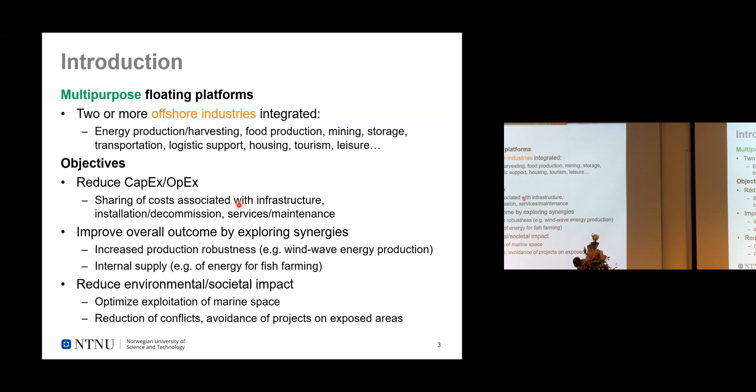So the scope here is multi-industry rather than multi-activity. For example, an FPSO would be an example of a platform that encompasses many activities, but it's not multi-industry because all the activities are serving the oil industry. So here I'm talking more about different industries. So wind energy and wave energy and fish farming, for example. And I'm focusing on renewable energy plus fish farming because that seems to be what's attracting most attention of researchers and industry lately. And there is a vast amount of publications and projects.

I'm talking about multi-purpose platforms in single blocks rather than modular platforms. And I'm sticking to preliminary design analysis because this is a non-established industry. We don't have any example of a commercial and successful platform yet. So it's not the time to go for detailed design and cost effectiveness analysis and those things.

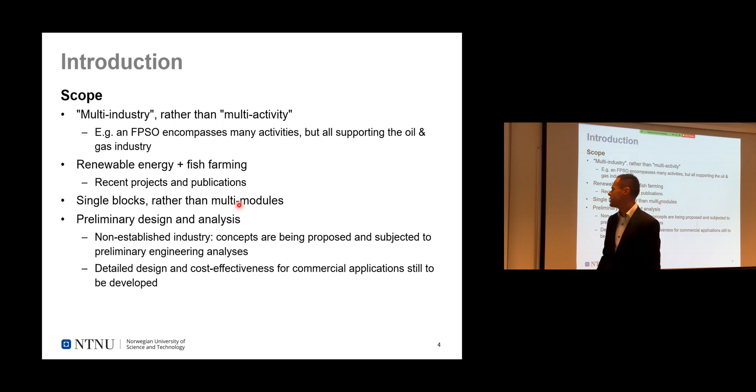Okay, so I think it's interesting to see some of the previous projects and concepts. The European Union has funded a number of projects in this topic. One of them is the Marina Platform that ran from 2010 to 2014, which had the goal to create new infrastructures for wind and ocean energy, including combined devices. So the outcomes were many publications on multi-purpose platforms, but also a lot of data for siting of these platforms and even supporting tools that are available to the public today.

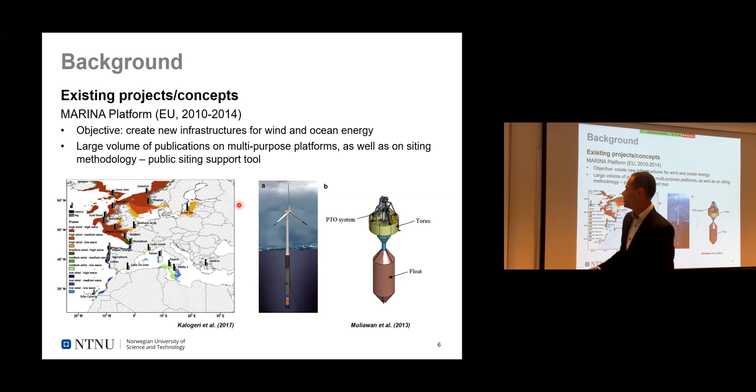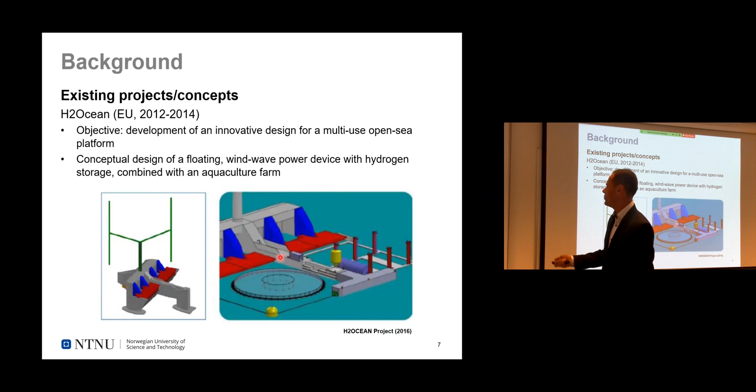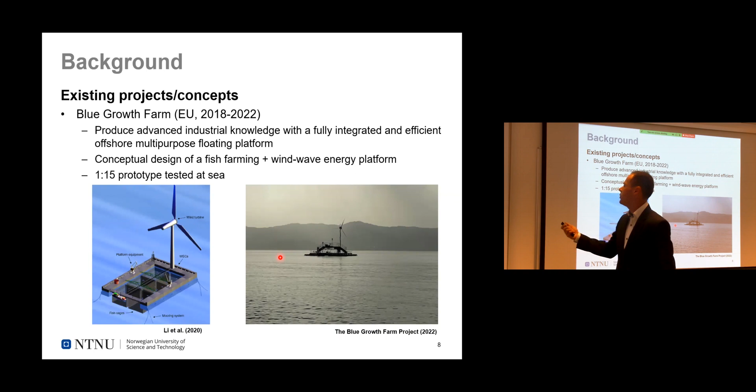The H2Ocean project was intended to develop one platform combining energy and fish farming together. It came to the conceptual design of this structure that has a vertical axis wind turbine, some wave energy generators, and a fish farm here in the wake of the wave energy device. And this Blue Growth Farm is a recent project that finished in March this year. The objective was to produce more advanced knowledge on the topic, and they came to a prototype, a 1:15 scale prototype tested at sea, which is a platform for fish farming and wind and wave energy production.

This example here is from a Danish company. It combines wind and wave production. So the wind can be from 4 to 15 megawatts. The platform can be modified. It also has a facility for storage of energy by electrolysis and hydrogen storage. And this is intended to be in the commercial phase now. But I don't know if they have sold one yet.

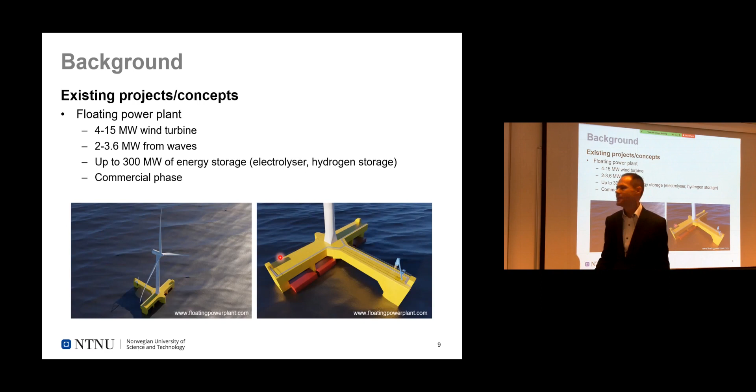I want also to show this example from a publication in Ocean Engineering some years ago. It's an example of a synergic design, which means that here they have a wind turbine, oscillating water column energy converter, and they also put a uranium recovery system to increase even more the cost effectiveness.

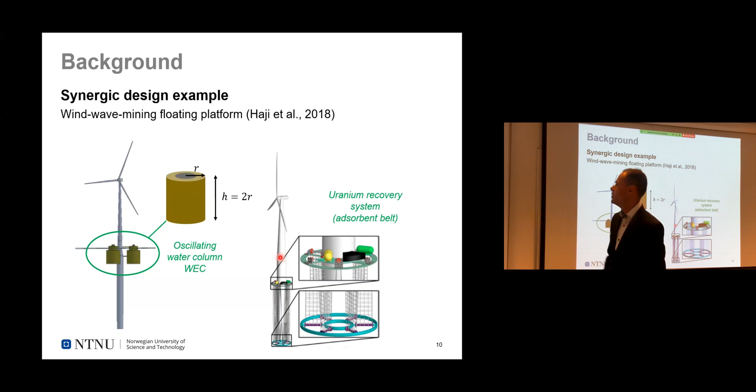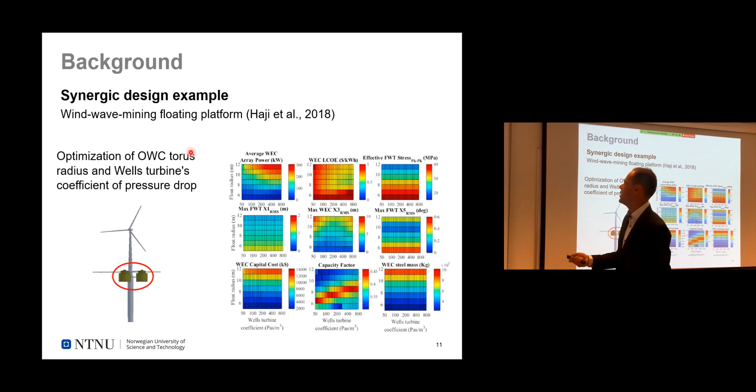But what's most interesting to see here is that this is the block that shows the stress in the tower of the turbine. So without the energy converter, the equivalent fatigue load during the lifetime of the operation would be more or less 30 megapascals. So it would be like this yellow bar here.

But as they install the torus and start to vary the radius, you can see that with a smaller radius, the stress is bigger than when you have a bigger than 8 meters radius. And that's because wave excitation up to 8 meters grows faster than the resistance to motion by inertia damping effects.

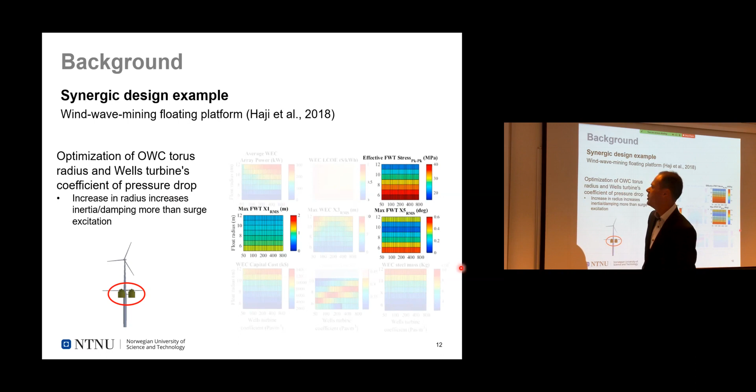And then you can see this is shown also in the surge and pitch motions. You can see the same effect, especially for surge. For pitch, it's a bit more confused. It starts to get lower again for very big radius. But okay,

then I think I can move to design. So I'll talk about some design considerations and show some of the methodology that have been proposed for this type of structures. I'll talk a bit about siting and construction considerations, station keeping, and design optimization.

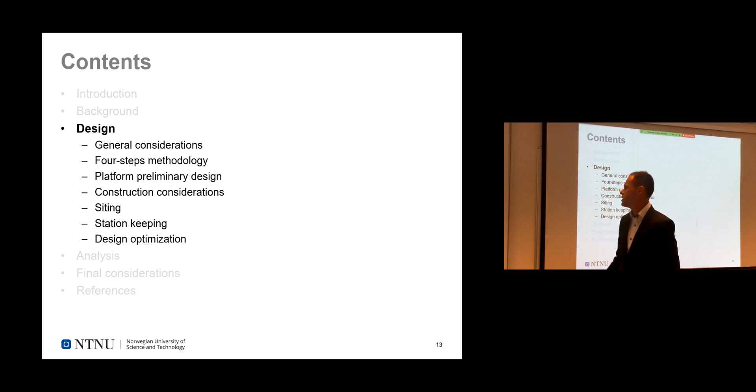So in general, we want to start from a dominant industry, which will be supported by other industries in the platform. So it's easier to establish from activities that are more established. So for example, if we're going to have a wind and wave energy converter together, the wind energy converter will probably be the dominant technology because it's been there for a long time.

The selection of activities will depend on the resources and the surrounding infrastructure, and not least social and cultural aspects, because resistance from society can be a problem for renewable energy in general. We have to live with the fact that we are going to reach suboptimal systems with the combined solution, because it's very hard to optimize all the activities at the same time. You sometimes can have conflicting constraints and objectives.

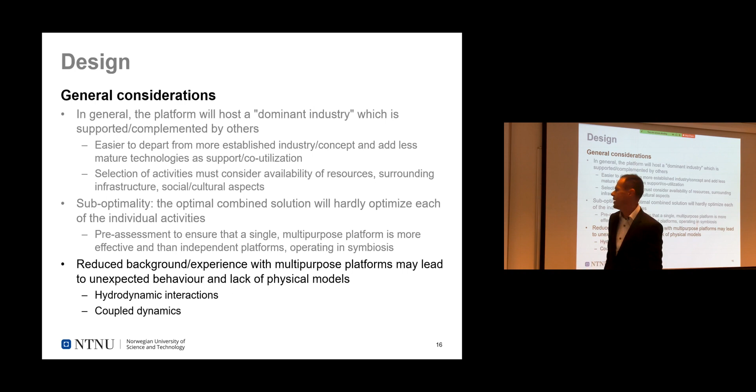So a pre-assessment is important to ensure that it's really more effective to have all the industries or activities combined in the same platform than having independent platforms optimized for their purpose, operating in symbiosis. We don't have a lot of background with these platforms, so unexpected behavior due to unmodeled physical effects has also to be expected during the design. That could be hydrodynamic interactions or unknown coupled dynamics.

Okay, so to cope with these complications, there have been some design methodologies proposed by these European projects before. So this one is very clear. It starts with a pre-screening process where you do a preliminary assessment of the available resources based on metocean conditions. And you compare it with thresholds.

For example, if you want to have a wind turbine, you want to have a minimum mean wind speed at the site. Or if you want to have fish farming, there is probably a limit in the temperature of the water. And also, at this stage, you're going to determine the feasible sites. Or if you have a number of sites that you can use, you're going to determine which industries will be embarked in the platform.

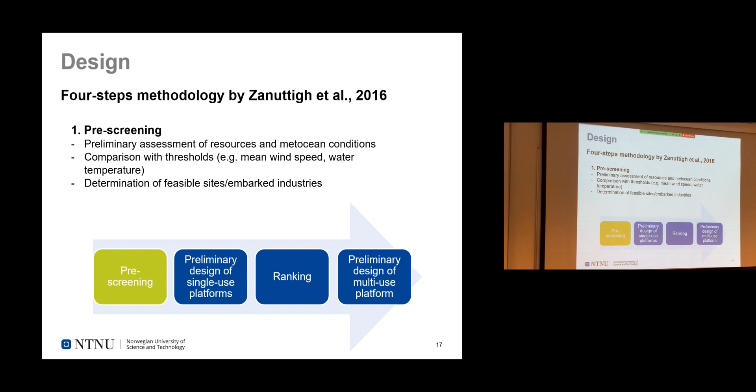The second step is the preliminary designing of single-purpose platforms for each of the technologies that we're going to install. So here, you can make a more detailed selection of the energy harvesting technologies that we're going to use. It's the time also to check for any legal constraints and to start to think about the solutions that you can have for multi-purpose platforms.

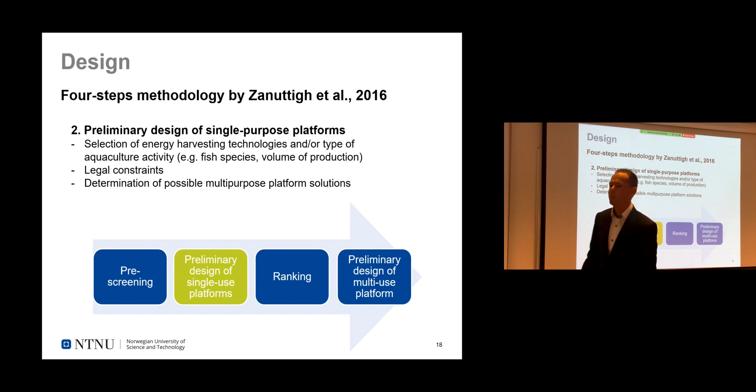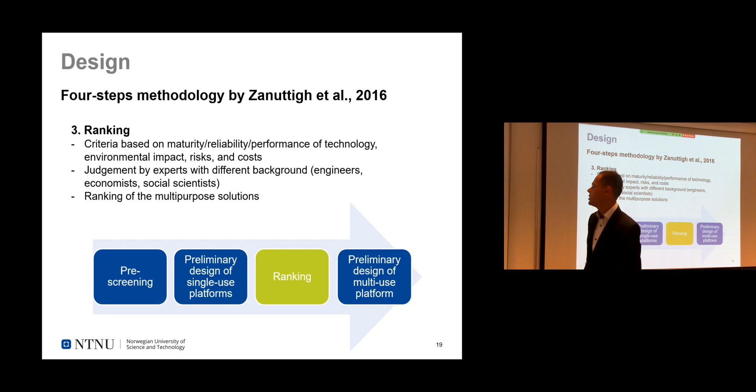The third step is a ranking. So first you create a list of criteria based on maturity of the technology, environmental impact, risks, etc. And then you call a team of experts with different backgrounds. So not only engineers, but also economists, social scientists, biologists. And this team of experts, based on the criteria, will make a ranking of all the solutions and see which of them are the most viable for that purpose.

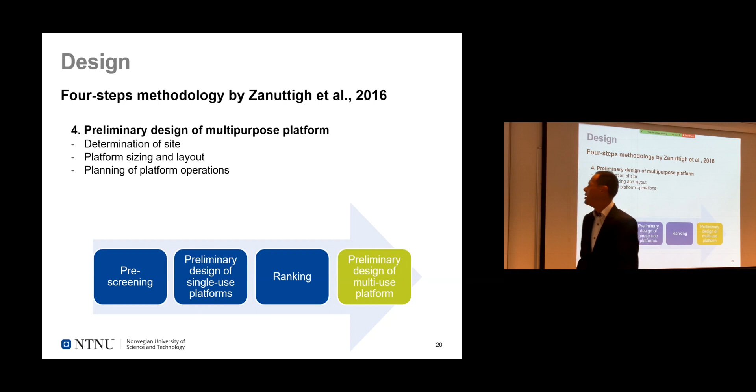And finally, the last step is to start with the preliminary designing of the platform. So we are going to have the final determination of the site and start with the sizing, layout and operations planning. Okay.

Yeah, the preliminary design starts with some candidate layouts. So the dominant technology will be the most important in the arrangement. The required capacity production for each activity is an important factor here. And then you make incremental changes on the dimensions and the layout until we reach a good configuration.

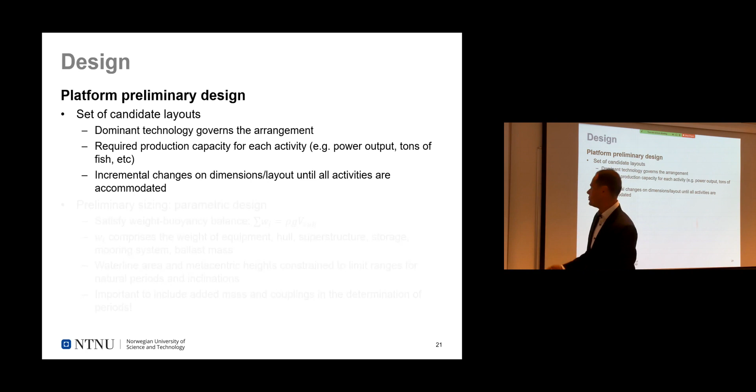So the parametric design consists of modifications of the dimensions with increments. You always want to satisfy the weight buoyancy balance because it has to float, but also want to ensure that limit ranges for the natural periods and metacentric heights are satisfied. It's important in this phase to include some good estimation for added mass and couplings for determining the periods.

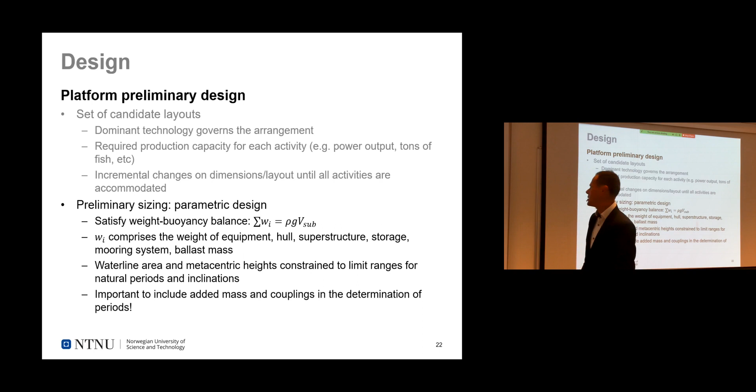And here, I found this example that I found very interesting. So in the design of the Blue Growth platform, they were looking into the walls of this caisson platform. So these yellow lines here are the cross-section of the walls. They started with this rectangular cross section, and they got to this expression for the period in heave.

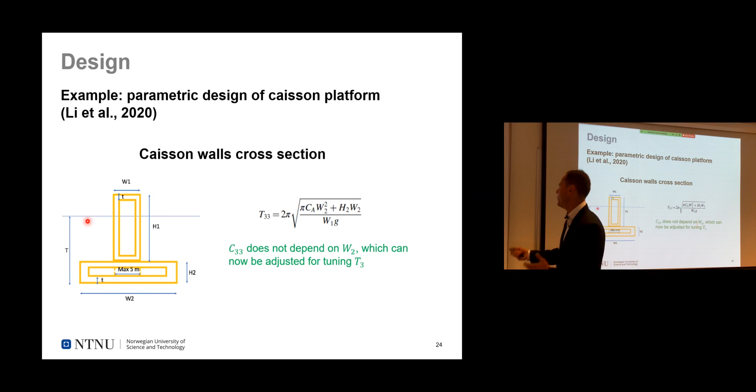But in this expression, they find that it's impossible to get a natural period in heave away from the wave frequency range unless they use a very, very large value for the width of the cross section. So then they moved to this different configuration. So here the water plane area piercing the surface is no longer changing with the width, and then they could vary the width in order to get the desired natural period.

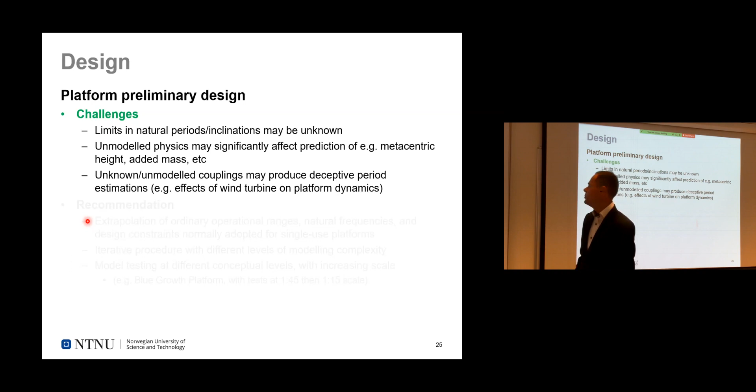Challenges that we're going to meet in this process are that we don't know what are the limits in natural periods and inclinations for all these platforms because they are very innovative. We have unmodelled physics. So for example, if you have these wave energy converters appended around the platform, they can affect the flow. And if you have, for example, a moon pool, you can have free surface effects. And these unmodeled couplings may produce deceptive period estimations. So you can have some bad surprise in the future.

So here, the way to cope with this is to, as long as possible, extrapolate the ordinary operational range that we're used to from offshore industries, and also design constraints that we normally use for single-use platforms. And always, iterative procedure and model testing is very important at different conceptual levels.

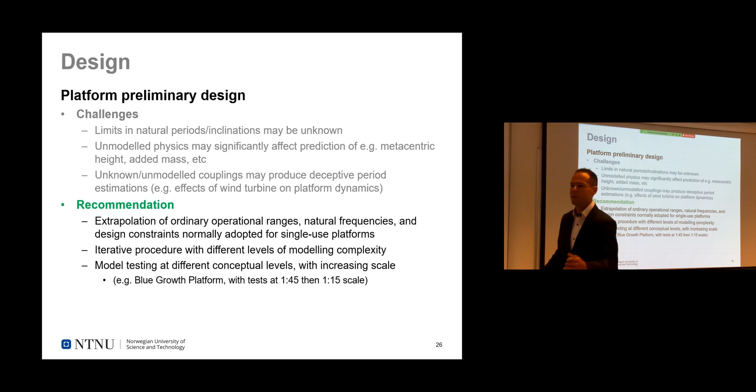Regarding material, steel is very popular in the offshore industry because it's reliable, it has good quality control standards, it's flexible and ductile. But for the size of these platforms, it may start to be more interesting to use concrete, which has extended lifetime and is not constrained, for example, to thickness of the steel plates, diameters of pipes, those things.

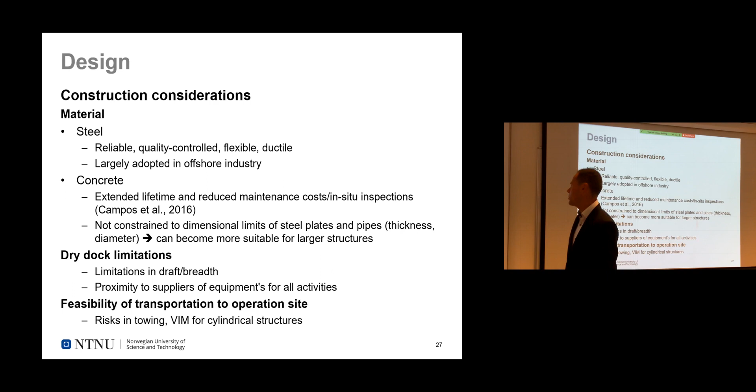During the design process, we have started to think about limitations in the shipyard. So dry docks have a limit in draft and breadth. And it's very important to have a network of suppliers close to the construction site. And it's also important to think about the transportation to the site when you're planning which shipyard you're going to use, because towing is a risky operation. And we have seen vortex-induced motions for cylindrical structures being towed to the site before. Okay.

Siting. So the choice of the place where the platform is going to operate starts with the general requirements for each of the industries. So we have to find a place where resources are available, if you have enough wind, enough wave, and enough insolation. Also, water depth is very important because that governs the mooring design a lot. Temperature, salinity if you're going to go for fish farming, extreme phenomena, and logistic benefits and challenges, so if it's close to harbors and to maintenance hubs.

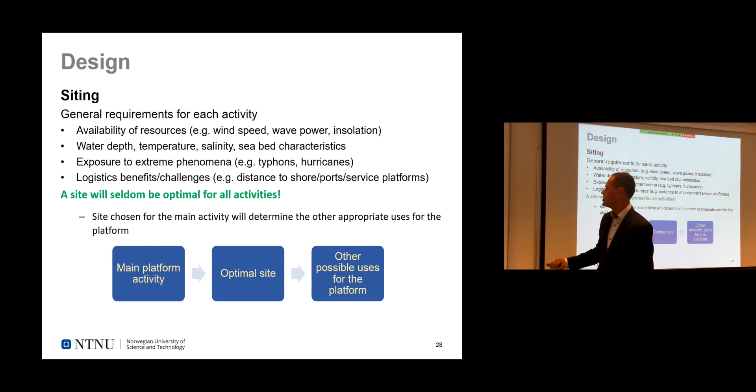But a site will not always be optimal for the activities. So again, if we start with a main industry for the platform, you might want to privilege that industry and then choose the optimal site and check for the possible uses for the platform together with the main industry. It can be a very confusing process to find a good site because you have a lot of requirements, a lot of parameters, for example, wave height, wave period, mean wind speed, directionality. So for this purpose, there are some supporting tools based on geographical information system technology.

MARINA Platform created one public tool for this. So basically, what the system does is start with a large volume of data, and then as you set your thresholds and constraints, it will swipe the database and find what are the possible sites to be used.

One important thing to think about is that the correlation between the environmental agents can be as important as the parameters themselves. For example, with a wave and wind energy device together, it may not necessarily be better to have correlated agents. Instead, you want wind and a swell system, because then the swell is not correlated with wind, and you don't have peaks of production at the same time. You can have a smoother energy output.

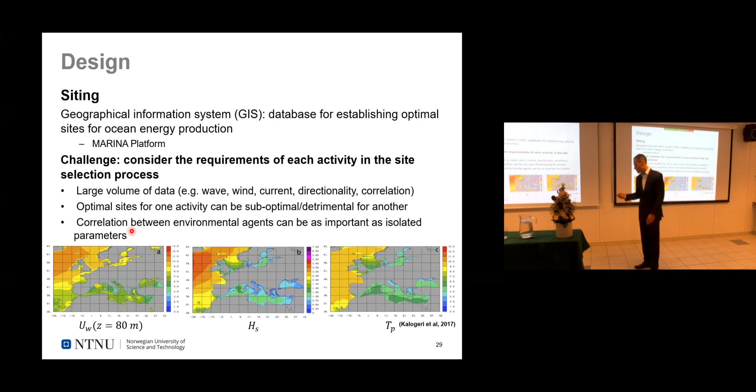There is also a systematic procedure for siting proposed in literature. First, you find all the relevant parameters, thresholds, and ranking. In a secondary step, you go for criteria which we have less confidence with, due to lack of background with this type of technology, and that can involve logistics, environmental impact, shipping traffic. The last case is to go for case studies, where you do a detailed analysis where you can have, for example, the outputs of the systems, and really check if the site is adequate.

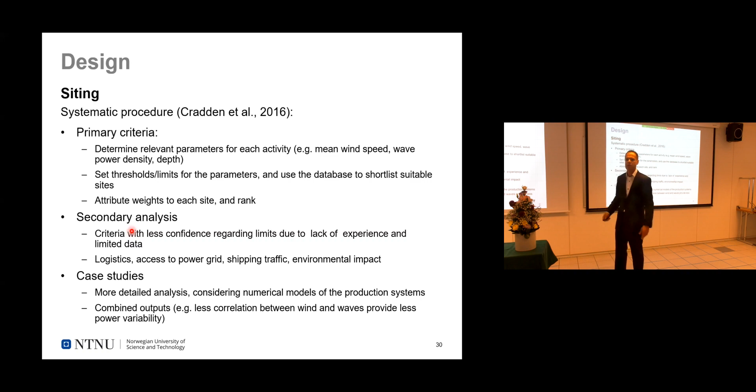When it comes to station keeping, we want to avoid the platform drifting away. A mooring system normally is a combination of chain and polyester lines, which could be catenary, taut, or tension leg systems. If the heading of the platform is to be constant, you can go for a spread mooring system, or a single point mooring if you allow the platform to weather vane. The mooring system is more adequate for permanent systems.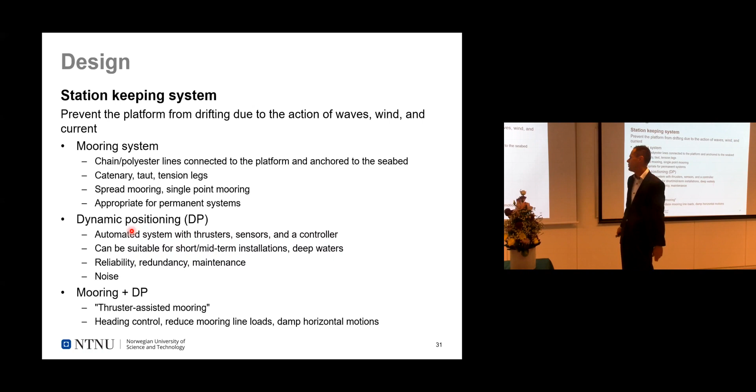But if you design a platform to operate for shorter spans of time and in deep waters, it may be the case to start thinking about dynamic positioning, with the use of thrusters to automatically keep the platform in position. They have, of course, some worries with reliability, redundancy, and maintenance, and they are noisy, so probably not very adequate for fish farming facilities. You can, of course, combine both and use the DP system to reduce loads in the mooring system. That's also possible.

One of the most popular systems for mooring design is catenary, where you can have some excursion. The main requirement is to allowed excursion and natural periods, and the restoring will be provided by the weight of the lines. Basically, it's a function of fairlead to seabed distance and pretension. You can combine chain and polyester segments to have a lighter final system, and use buoys and weights to force the geometry and optimize the restoring for less chain and polyester.

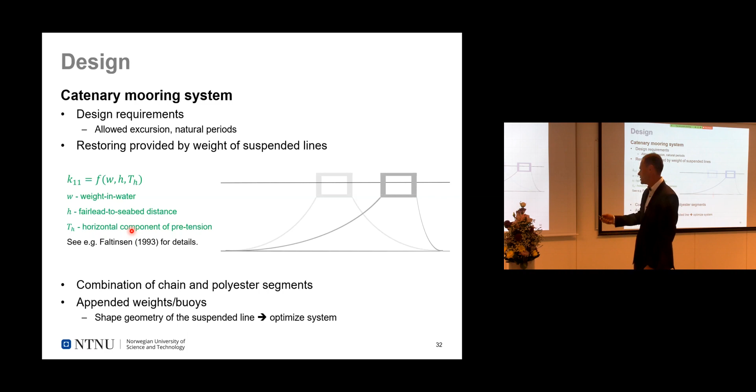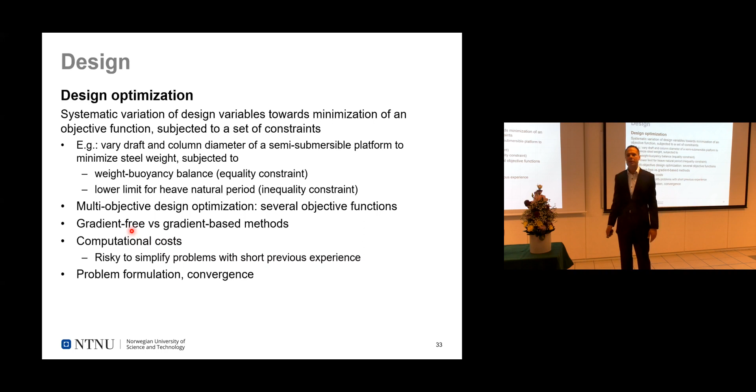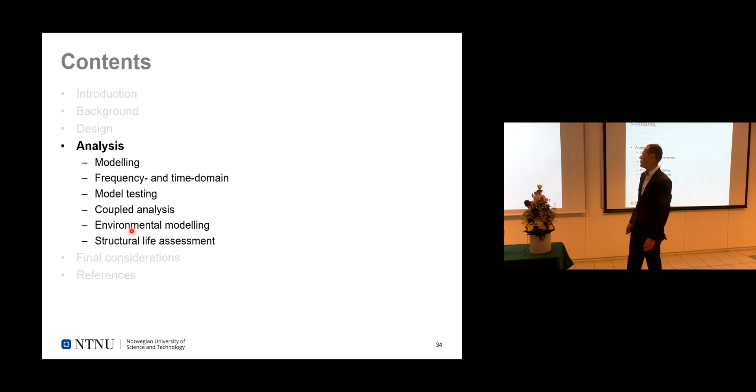Okay, now when it comes to analysis, I'll talk about modeling. We discuss frequency and time domain methods, model testing, coupled analysis, and then environmental modeling and structural life assessment.

The objective with modeling is to represent the dynamics of the system with mathematical models. The first thing to choose is the level of complexity, which is the number of degrees of freedom: if you have a rigid or flexible body, the nonlinearity involved, hydrodynamic effects, couplings, and all the controllers that can affect the dynamics and performance of the system.

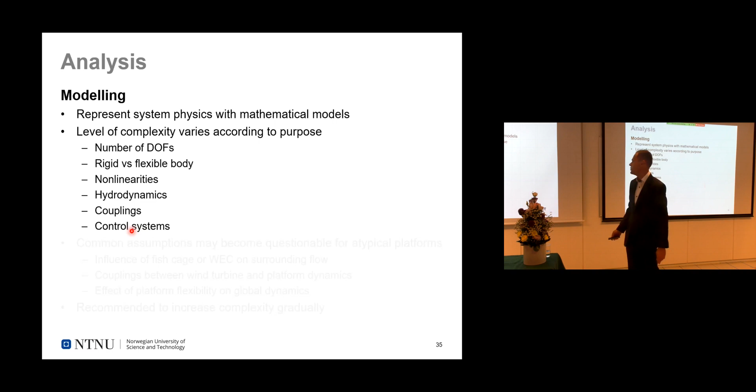Some common assumptions that we use for one platform for one purpose cannot be adequate for multi-purpose platforms. For example, will the fish cage or wave energy converters affect the flow? Or will the wind turbine affect the dynamics of the platform? Is the platform flexible enough to affect the global dynamics? So the recommendation here is to go slowly and increase the complexity gradually.

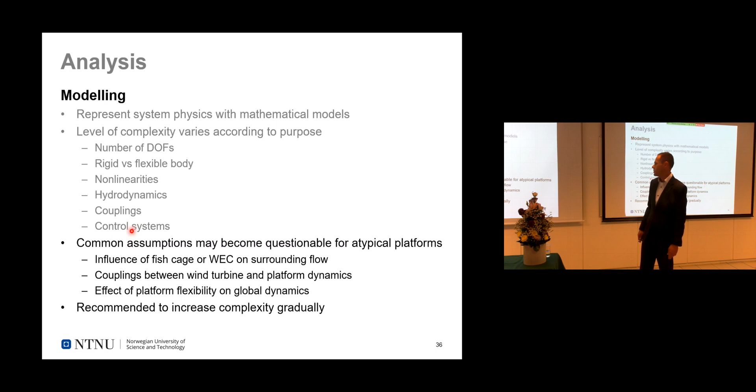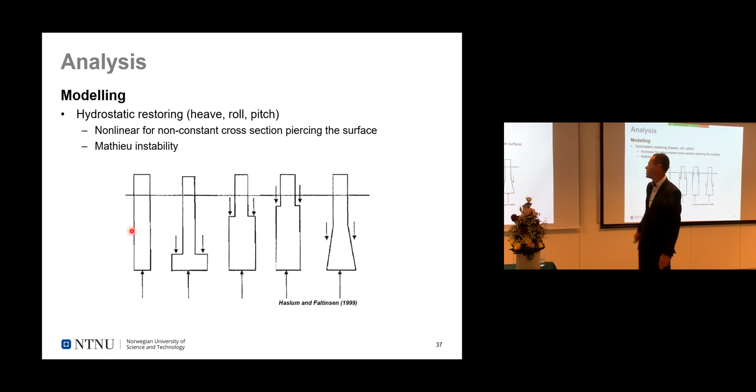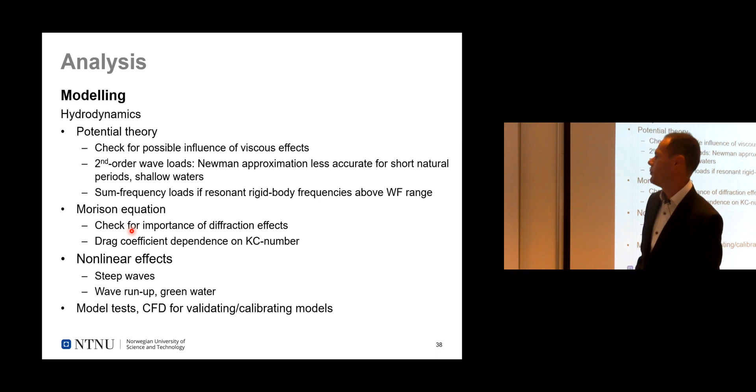When it comes to nonlinear effects, it's hard to list all of them, but I can think of steep waves, wave run-up, and green water. So it's always a good idea to rely on model tests and use CFD for both validating and calibrating the models that we have.

For some applications, it may be the case to model the structure as flexible. Then you can get the sectional loads directly from the analysis, but it's also necessary when the flexibility of the platform affects the global dynamics.

Here we can choose between modal superposition or finite element methods. There's a discussion about computational costs, whether software is available, whether it's straightforward to determine the mode shapes, and whether the pattern of the load is complex or not.

Then we come to distribution of the loads over the hull. We can use Morison's equation, or a more sophisticated approach would be distributed potential theory, which is more complicated. Hydroelasticity here refers to the two-way interaction between structural deformations and the surrounding flow, meaning the flow will deform the structure and the structure will also affect the flow, back and forth. This is not expected to be a big problem for concrete or steel structures with dimensions on the order of tens of meters.

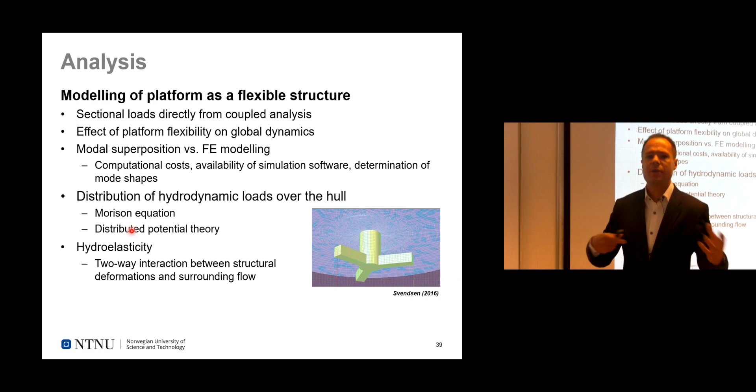For model testing, this is normally a very important step in the design of any offshore structure, but for multipurpose platforms it can be more important and more complicated. First, Froude scaling, which is a typical approach for many offshore applications, becomes questionable for platforms that have slender structures appended to it. It can also be the case that you have different scaling laws within the same platform.

I used here the example of floating wind turbines, which are actually single-use platform devices, but I have two different tests here. In the first, the hydrodynamics are scaled with Froude scaling, but the aerodynamic loads are scaled with geometric scaling, keeping the tip speed ratio constant.

What we do here is apply the loads at the top using a system of cables. But at the bottom, they do the opposite: they kept the aerodynamic model with the appropriate scaling law, and the motions are imposed and simulated at the bottom. I think this type of procedure will be more and more required for multipurpose platforms, because you can have other scalings that can't just be left out.

If the platform is too big and elasticity is important, that can also be a complication, because it's quite challenging to model bending stiffness in tests. Indoor facilities may start to be too small for some of these concepts if they are too large and can't be scaled down enough. So full-scale testing is probably a step forward for this type of industry.

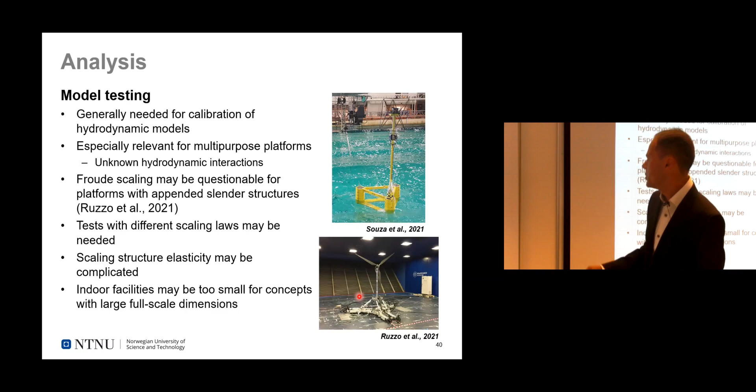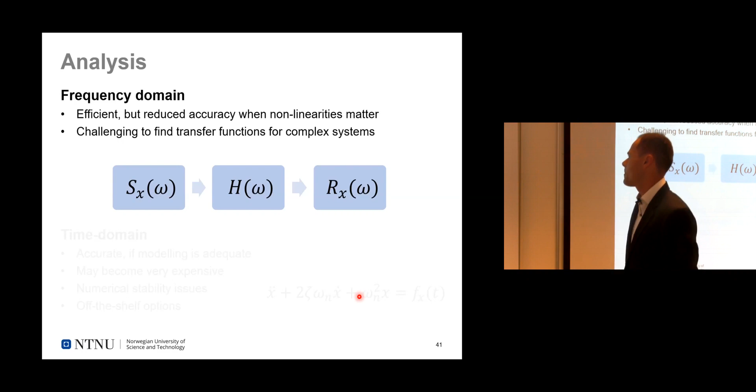Regarding frequency and time domain methods: frequency domain is quicker, but if nonlinearities matter, the accuracy can be greatly reduced. Basically, we start with a forcing spectrum, use a transfer function, and get a response. But finding the transfer function can be very challenging if the system is quite complex and has many degrees of freedom. An alternative is using time domain methods.

Time domain methods are accurate if your modeling is good. They can become very expensive and have numerical stability issues, especially if you have finite elements together. One advantage of time domain methods is that you have many off-the-shelf options available, which may not be the case for frequency domain.

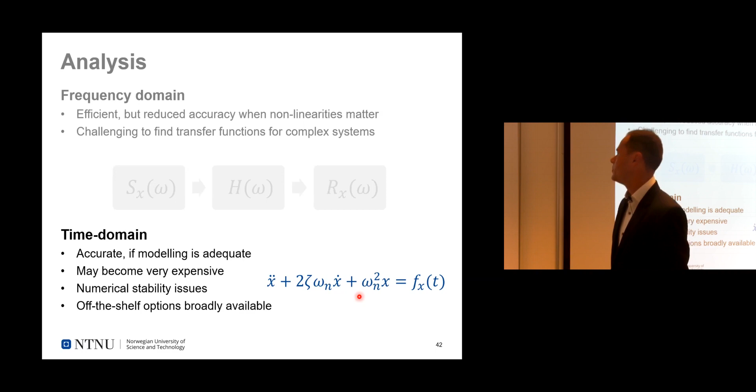Coupled analysis is a type of simulation which you do when you have different subsystems interacting with each other. For example, if you have a wave energy converter and a floating wind turbine, the converters can affect the motions of the floating wind turbine, which will also pitch the platform and affect the performance of the energy converters. Or if you have very large bodies but also slender elements, you want to combine rigid bodies and finite elements, so each of them interacts with the dynamics of the other.

For the offshore industry, the state-of-the-art approach is what we call aero-hydro-servo-elastic analysis, which basically just means having all the important loading at the same time and interacting with each other. It's not very complicated to add models for wave energy converters and fish cages, for example. We can use off-the-shelf software and just implement the load models if needed.

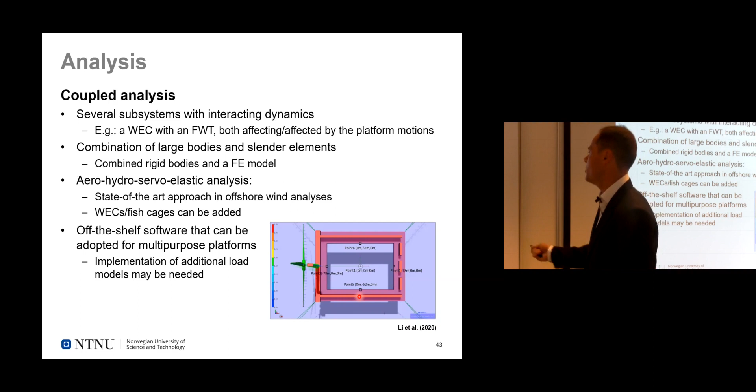Environmental modeling is very important when it comes to analysis. To characterize the wave system, we normally speak about significant wave height, mean peak period, and incidence direction. An appropriate spectrum formulation is normally given the metocean data also. If directionality is important, you have to go for short crested seas and use some of the spreading energy functions.

A discussion that may be new for these systems is whether you have to model wind seas together with swells, because if you're combining, for example, wind and wave, it can be interesting to have swell systems. For example, this picture is from Wave Watch, where for the same site you have one wind sea and three swell systems.

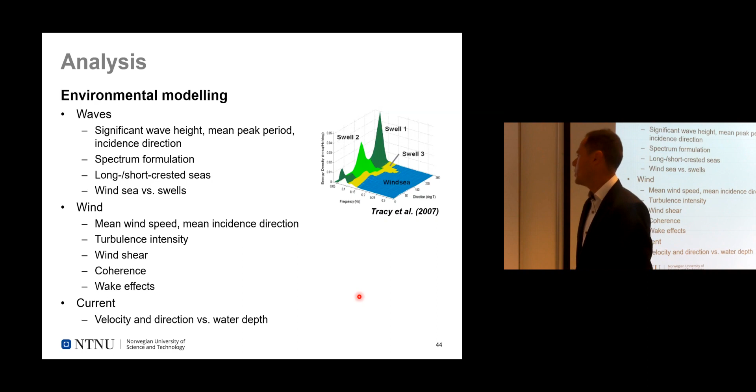For wind, we normally need to have the mean wind speed and direction, turbulence intensity, wind shear characteristics, coherence, and wake effects if you have more than one platform at the same site. With current, the approach is normally to have a profile of current velocity and direction versus water depth.

Metocean data is a database describing waves, current, and wind for a given site. There's a lot of publicly available data from previous EU projects, but also from Wave Watch, provided by NOAA from the US government. Normally we assume that a short-term condition will last 1 to 3 hours, so this data can be given in this time span.

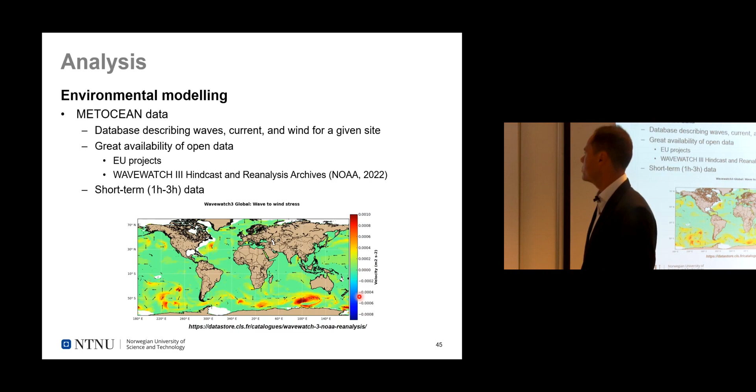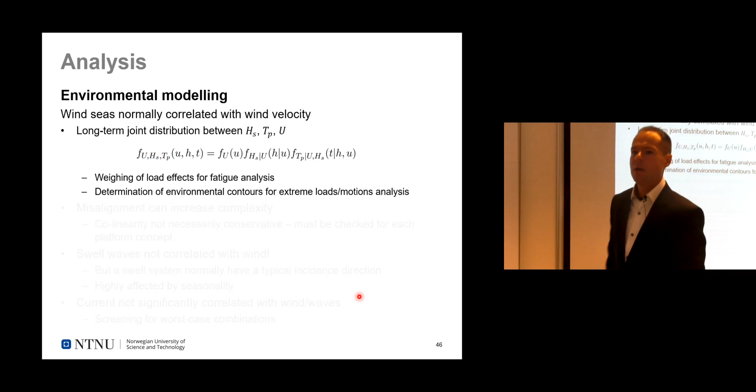Wind waves are in general correlated with wind velocity, which encourages us to use a long-term joint distribution between wave height, period, and velocity. This kind of distribution is useful, for example, to weigh the load effects for fatigue analysis from the different bins in the scatter diagram, and also to find environmental contours for extreme loads and motions analysis.

Misaligned environment can increase complexity. A collinear assumption of wind, waves, and current may not necessarily be conservative. That has to be checked for each type of concept.

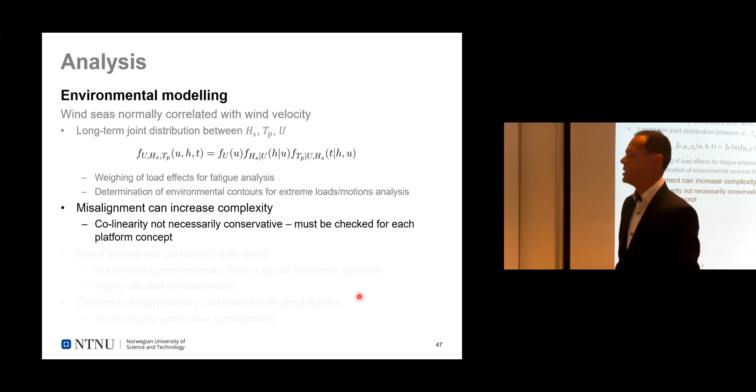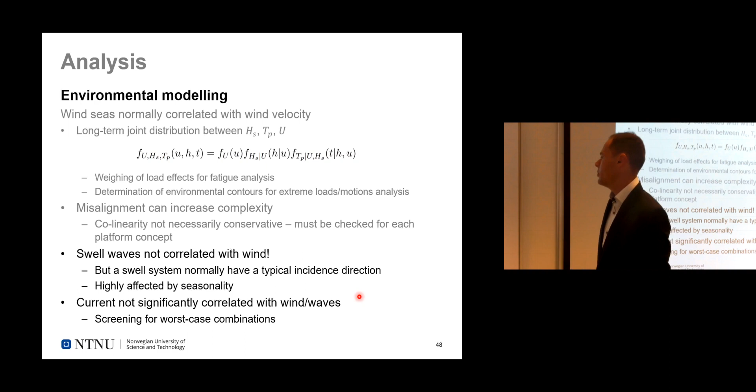Swell waves are normally not correlated with wind, but they normally propagate in a preferred direction and are highly affected by seasonality. So at least in the initial design process, you can normally assume swells to propagate in just a few directions. Current is also not normally correlated with wind and waves, so it's again the case to make a screening of different combinations and find the worst case scenarios.

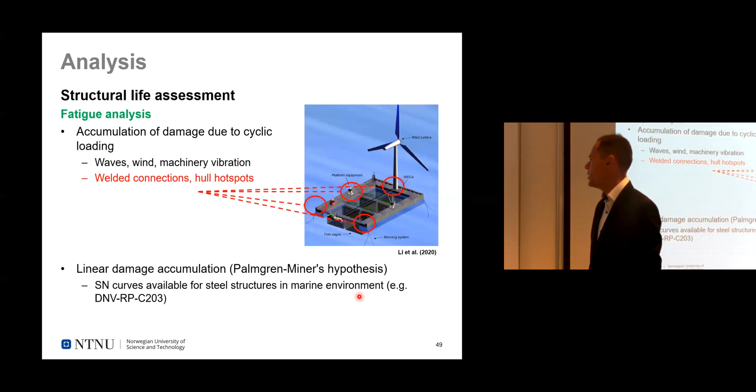Fatigue analysis is about accumulation of damage at different places in the structure due to cyclic loading coming from waves, wind, machinery, vibration. It's normally the case that the more dangerous spots would be welded connections and sharp corners in the hull. For steel structures, it's normally at least a good start to use the linear damage accumulation hypothesis from Palmgren-Miner and SN curves that are available in standards.

The procedure here would be to start with a scatter diagram where we have the combinations of significant wave height for each mean wind speed. So what to do, for example, if you have a wind and wave energy platform: you have one scatter diagram for each wind speed, you simulate all the relevant bins that have some threshold in the probability of occurrence, then you get the damage from each of these simulations. You normally want to have several realizations of each condition, and then you make a weighting procedure with the long-term distribution.

It's important to say that simultaneous operation of different machinery can impose cyclic loads that will superpose on each other, and this can affect the associated damage.

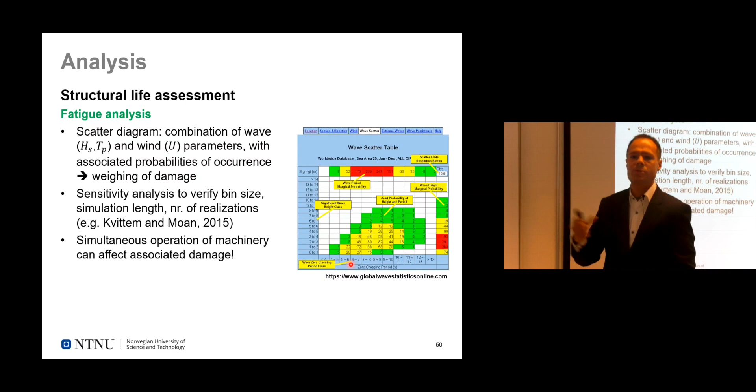For extreme analysis, it's about ultimate loads or extreme loads and motions when you have a combination of wind, wave, and current. That can provoke not only material yield but also, for example, buckling or excessive motions in machinery that can damage wind turbines or the converters. It can also be detrimental to the fish species being produced if you have a fish farm.

It's important to mention that extreme loads are not necessarily happening under extreme conditions. For example, if you have a wind turbine on the platform, the biggest load will probably be around the rated wind speed, probably the biggest wind load, and that won't always correspond to the most extreme condition, the most extreme waves, for example, but that can be the worst case, especially for bigger structures.

Okay, so basically the procedure here would be to select a number of load cases and run a number of simulations. So, for example, usually 20 simulated realizations for each case is a good number to start with. For each of the simulations, you are going to get the extreme and fit to a distribution, where the Gumbel distribution is normally suitable for marine operations.

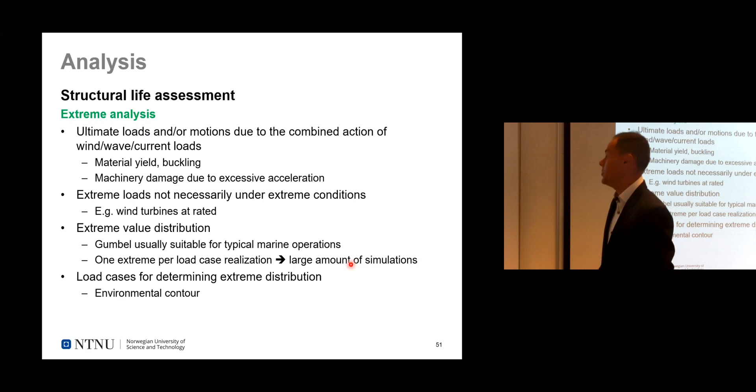Other methods to avoid the amount of simulations could be, for example, peaks over thresholds. So you set a threshold and measure the number of peaks, and then distribute these peaks on the distribution. There are different approaches. Yeah, accidental limit state is about atypical loads and events that can affect the structural integrity of the platform. For example, ship collision, or if one of the mooring lines breaks and the platform loses position.

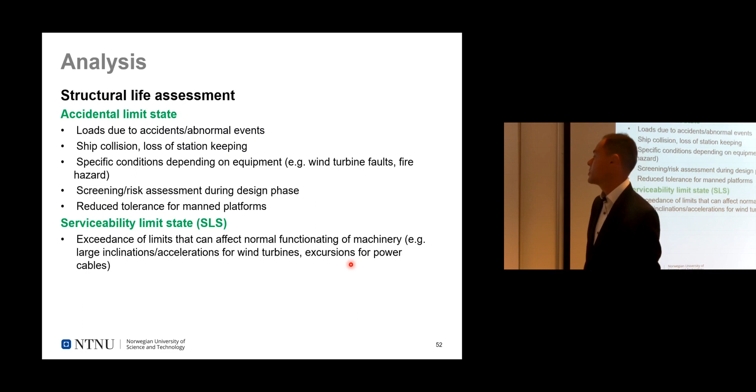It of course depends a lot on the type of equipment and the industry that you have. So if you have a wind turbine, you're probably going to screen for wind turbine faults. There is fire hazard for all kinds of equipment. So this is also something to screen and risk assess during the design phase. And of course, if the platform is manned, which is the case probably for fish farming, then the tolerance to this type of accidents is much smaller than if you have an unmanned platform.

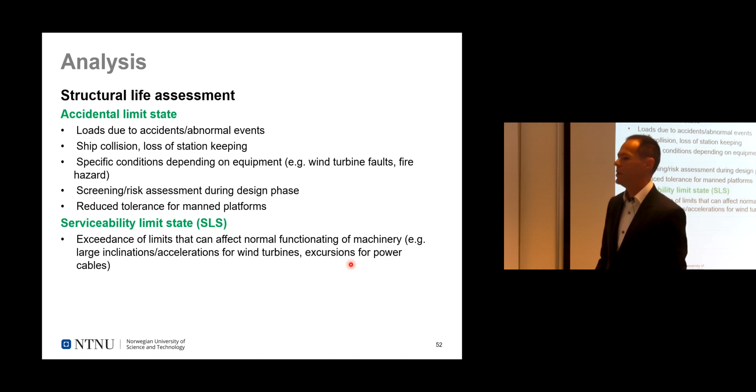And it's also important to consider serviceability limit state, which is cases that the platform has to stop operating and producing depending on limits during the operation. This also depends a lot on the type of platform and should be considered during the design phase. So yes, multipurpose platforms can be really very cost-effective and save resource and construction efforts, but its viability is subject to the performance, costs, and environmental impact in comparison with independent platforms operating in synergy.

If resources are available and correlated, because as I said, if you have high wind and wave peaks at the same time, they won't be very helpful in power output. Existing logistics support networks and construction facilities, if the transport is viable and those things. And design of multipurpose platforms can be more complex than single purpose platforms because we don't know performance criteria. We don't have a lot of background with this type of platforms. So it's good to lean on the systematic approach that you can find in literature, at least to have a starting point.

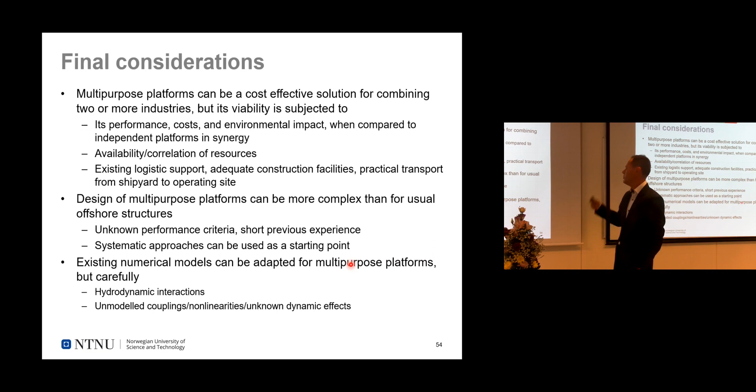And existing numerical models can and should be adapted for multipurpose platforms, but you have to be careful with hydrodynamic interactions and couplings and nonlinearities and any other effects that we don't know. So always use a lot of iterations, model testing, and CFD. Yeah, so this was it. So, thank you.

So thank you very much, Carlos. Okay. It's working. All right, so thank you very much, Carlos, again. There is no official requirement for questioning of the trial lecture, but I would like to ask the committee if they would like to have clarification. No specific. Professor Colo, would you like to have any clarification?

Yeah, I'd be interested in hearing Carlos' opinion about one particular point. So I'm aware of the fact that this was just a brief investigation to prepare the trial lecture, and your PhD was on something else. But I wanted to know what is your opinion about this question. So, as you have also shown in your presentation, multi-purpose platforms may have some advantages with respect to a single-purpose platform under certain conditions. Why do you think that there are still no commercially viable or proven multi-purpose platforms out there?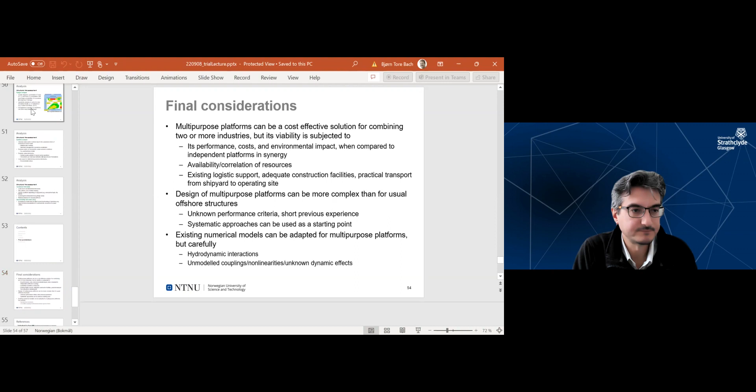The question is that in theory, you should basically run a fatigue analysis for each one of these combinations and then weight their contribution to fatigue according to the number of occurrences. And then you can kind of derive what is going to be the total fatigue accumulated by this particular platform. But this may mean hundreds of simulations, also taking into consideration the fact that you need to do the same simulation more than once because of the stochasticity of wind and waves, and therefore use several seeds.

My question is, if you are in a kind of optimization framework where you cannot afford to do hundreds of simulations for each iteration of your design, trying to find the optimum solution, how do you rank or select which ones are the most important sea states contributing to fatigue?

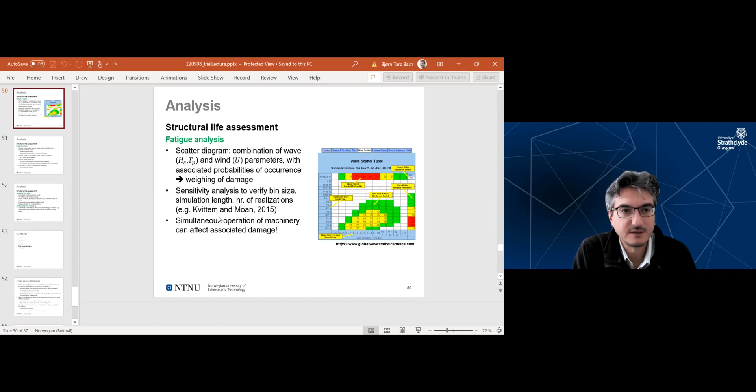Mm-hmm. So, for example, if you have a semi-submersible, you say, okay, I will do this initial analysis for a column with 10 meters, and then I'll run another for a column with 15 and a column with 8. And then you check if this analysis changed too much between them. You say, okay, inside this range, I can vary a lot. But if it goes outside this range, then I have to run it again. Okay. So it's a kind of pre-processing step where you try to get a sensitivity of how much is the impact of the parameters on this sensitivity analysis. Exactly. And that's probably very time consuming, but that's how it is.

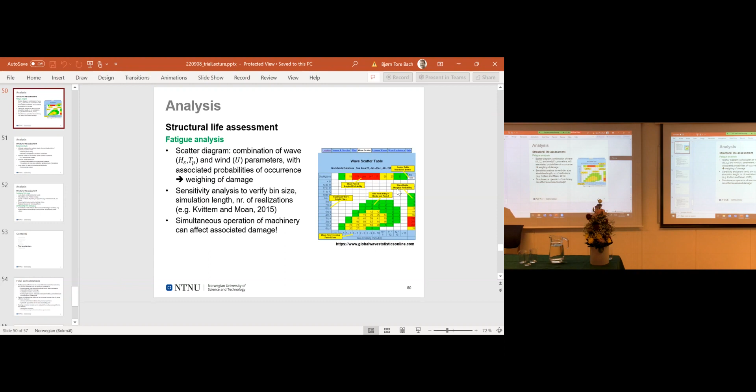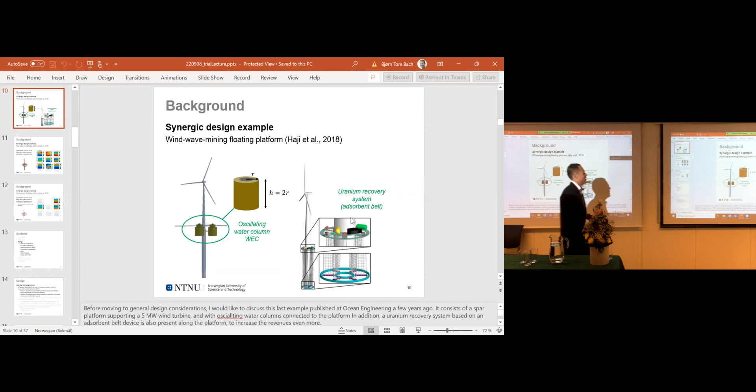Just a short follow-up. You have mentioned the combination of wind energy, wave, and fish farming. But in your literature review, did you come across any other technologies or energy converters or whatever? Yes. In your very top. Virtually, maybe you can navigate more easily. Okay. So this one. Yeah, and maybe a follow-up on that, what kind of combinations do you see as most realistic?

I like the combination of wind and fish farming for the reason that I said to Mauricio, because they are two more or less established industries. And you don't expect the dynamics to interact with each other so much. But the main advantage is that then you can have a more guaranteed supply of energy to the fish farming, provided that you can store the energy from the turbine. So if I would invest in some technology, I would start from this combination where I have two industries that are more established and one can supply the other.

Here for this one, for example, I don't know how feasible it is because I don't know anything about uranium recovery, but what they propose is to just append something that's not going to affect the dynamics a lot for a wind turbine, and that could potentially increase the revenue. So yeah.